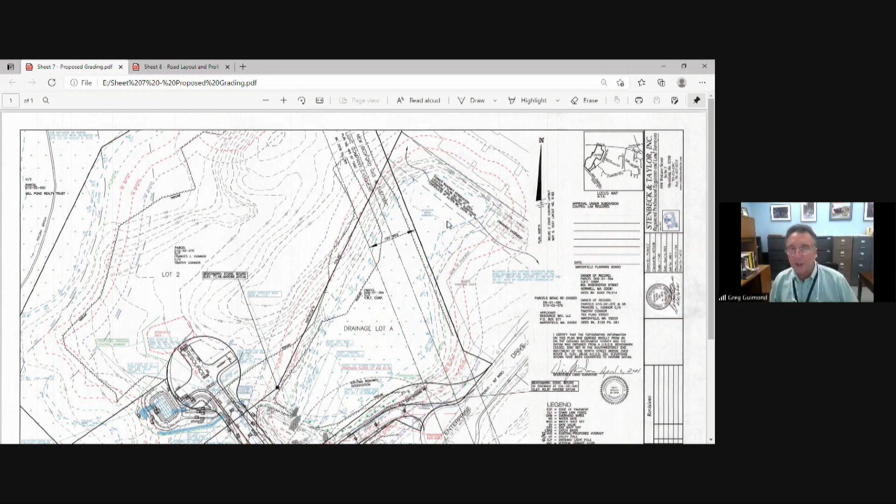Peg, can you hear us? Peg, can you hear us? I can. Okay, we've just started the Resource Way public hearing on subdivision. Okay, all right, Terry, okay.

So anyway, that roadway reservation would have required filling part of the detention basin and presumably replicating the volume elsewhere on the parcel. That would not be allowed under the current conservation regulations.

In 2016, in conjunction with the sale of the Kerwin Surgical property, or the purchase of the additional property, Associated Engineers had shown on paper a relocation of that reservation, kind of looping through a good portion of the basin and extending over to land that was briefly under control of Tim Connor, that had been part of a parcel swap that was then swapped back to VRT.

Likewise, that would have required filling a good portion of the basin in order to construct that roadway.

In 2018, VRT wished to develop the portion of that parcel lying to the southwesternmost area adjacent to the state highway, and put the electronic messaging board in a small building that they could work out of in order to monitor the office park itself if need be. Through ZBA and through conservation, a site plan was permitted to basically undertake that work.

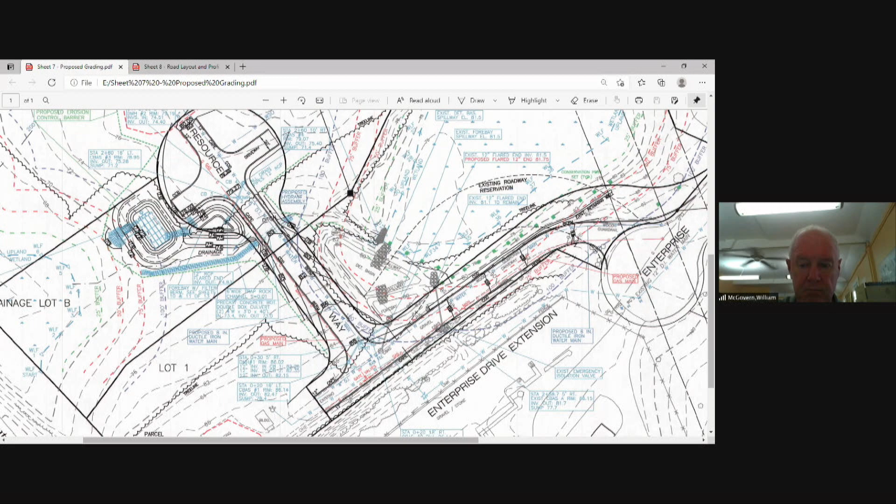This roadway, the Enterprise Drive extension, will access at a 2% grade off of Enterprise Drive from the cul-de-sac. We'll have a leveling area as we come in off of Enterprise Drive, and it will tip down at a 2% grade, translate down to a -4% grade in the middle, and then with a low point where this intersection is going to be, and then transition.

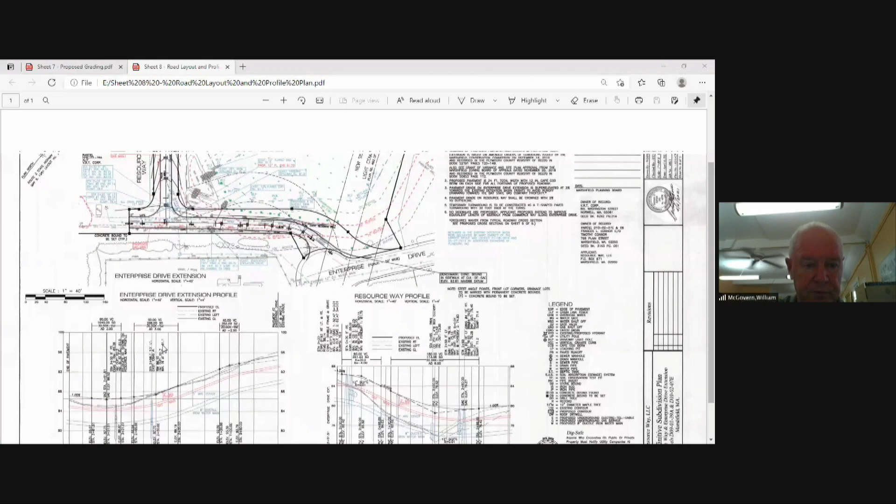And actually, I'm just going to flip, make sure I'm sharing, and then I'm on the profile sheet so that I have this correctly. And we'll transition to...

The remaining roadway going in, Resource Way, will go into the adjacent Connor parcel, coming off at a -1% to a 5% grade in the middle, and then leveling out with our low point being in the area of this T turnaround, leveling to 1%, then to +1%, because overall the site is fairly level. There's not a tremendous amount of grade change in this area.

Most of the existing site, the bottom of the existing detention basin is basically around elevation 70. The surrounding grade, up in the area of the wall and the roadway, is mostly in the range of elevation 72 to roughly 80.

The roadway, as we're proposing it, will have 22 feet of pavement with Cape Cod berm on either side. We're doing this for two reasons, and this is one of our waiver requests, shown both in plan view and in our cross section, which I'll slide over to in a minute. The first reason is to try to keep the amount of disturbed area as small as possible on the site.

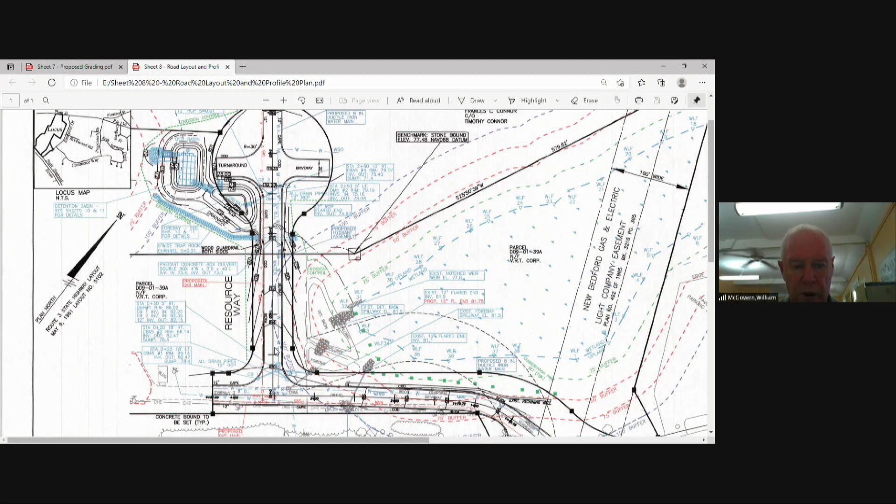Even though the existing detention basin is in fact a drainage basin and has been such, it does have the characteristics of a bordering vegetated wetland. There's wetland vegetation in it, and Conservation Commission has deemed that it is in fact a wetland. In working with them and maintaining the required setback distances, some of which they gave us a variance to, in order to bring this roadway in at a point that would require no disturbance of the basin, we've agreed to try to keep that disturbed area as small as possible.

This proposed roadway is intended to remain private and not be accepted by the town, but will be maintained by the McDougals and by VRT. It's only going to service this one lot or parcel. We'll have a drainage lot on it, solely for drainage purposes, but it will service one lot and is not intended to loop through or connect to any other adjacent parcels.

In keeping a narrower width of roadway, we're disturbing a lot less vegetated and wooded area of the site. Our cross section basically shows it.

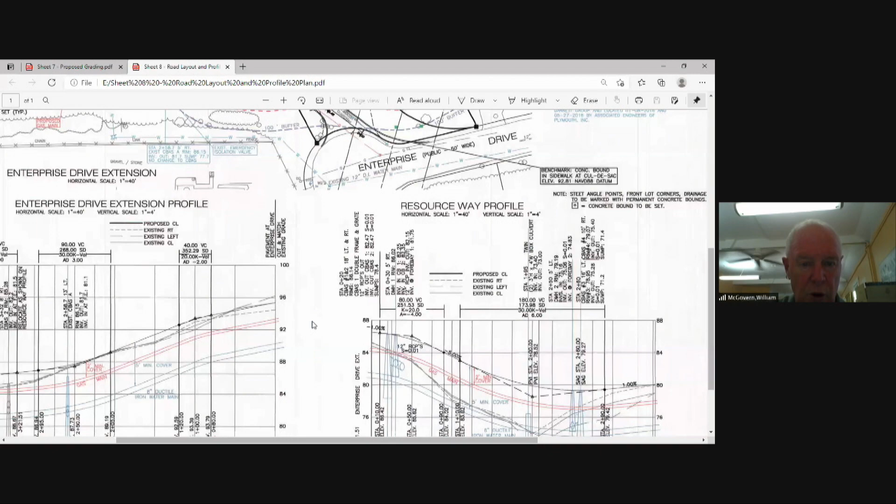What we would then do - I'll have to flip over to one more page to show that - is show a guardrail on either side of the roadway, just in the portion of the area where we're descending at that 5% grade, and we have some 3-to-1 slopes on either side.

And where we have a culvert that we're proposing near the low point, just beyond the property line, in order to culvert and direct any overflow runoff from the drainage basin and continue it downstream in the same location as it is now, we're actually showing a trap rock channel below that.

This has been the source of a little bit of discussion with conservation, because right now the overflow that comes out of there isn't causing a tremendous amount of scour. If you go out there after even a fairly heavy rainfall - I was out there, I want to say it was March, after a really heavy Saturday rain, and I went out the following Monday and took a walk around - basically what you saw was a lot of leaf and pine needle debris pushed around and arcing back and forth, kind of mushed all over the place, following a scattered path through the low area. No real scour, a little bit of sand, a little bit of sediment, but no per se erosion or gullies in that area. That's because there is a little bit of an energy dissipator coming out of that existing spillway.

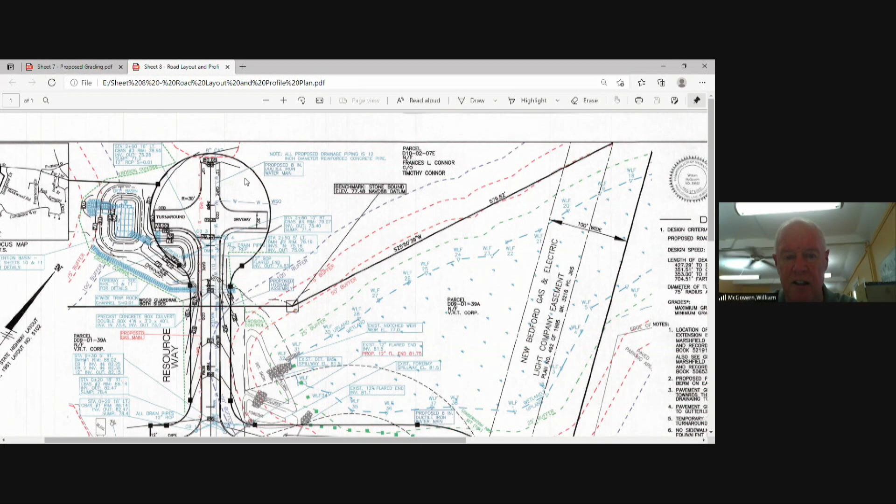Our waivers that we've requested are geometric or construction waivers, and the basis for requesting those waivers is the fact that they're taking place at the beginning of this proposed roadway in an area where we're constrained by that detention basin and by the amount of disturbance that we can create. I do have a couple of comparisons to illustrate, though.

We've asked for waivers regarding width, alignment, and grades of streets. And in my letter, I tried to break it out into a little table, if you will, to make it easier as to what was required and what was proposed. We do meet the right-of-way width.

We do have a 50-foot width, although we're throughout the regular portion of the right-of-way. We're showing as we connect from a property line perspective, as we connect to Enterprise Drive, we're obviously not touching the gas company property line, and we're making kind of a sweep in that area, so that will be an irregular shape.

But again, that's the kind of geometry that the site dictates to us, and we bring it in so that it meets an angle at the property line corner, so that we can bring that roadway in at a shallower angle.

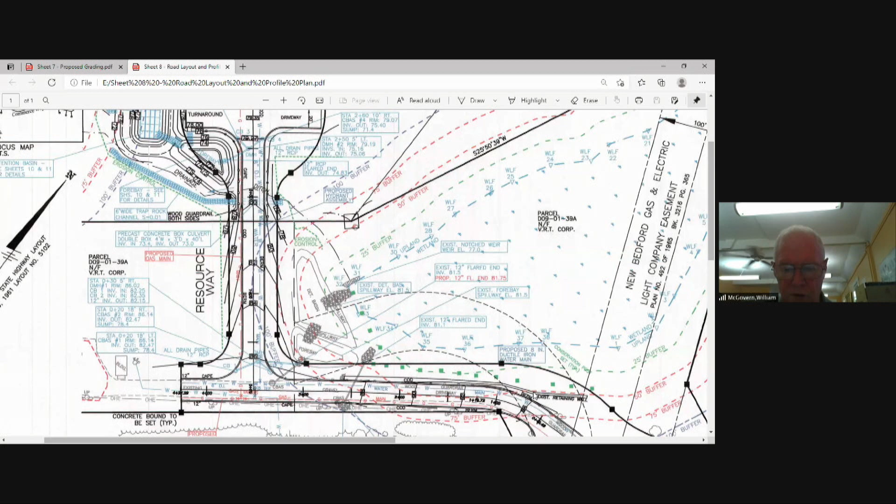On a 40 scale, it doesn't show up nearly as well, but what it'll do is it'll serve to push the tangent section over a little bit. And with that, what I looked at doing was potentially just flattening this section just a tiny bit so that you do come in at a little bit shallower approach in here, which will take a little bit of the onus off of that as well by pushing that pinch point out just a little bit.

But nonetheless, it would be a waiver because we'd be coming off of Enterprise and having less than 100-foot tangent section between the two. We could also put a speed limit sign up on it as well. But yeah, road narrows is absolutely appropriate.

The other, and obviously with that, with the geometric construction waivers, we'd be asking along with that the waiver for way lines being parallel and concentric, again, because we're coming off the existing cul-de-sac. Once you reach the point where that line can sync up with the gas company property line, then your cross section, or at least your roadway lines, are parallel and concentric.

And the new portion, it would push over into Resource Way, is a concentric layout. Everything is right down the middle there. Our center line runs the same.

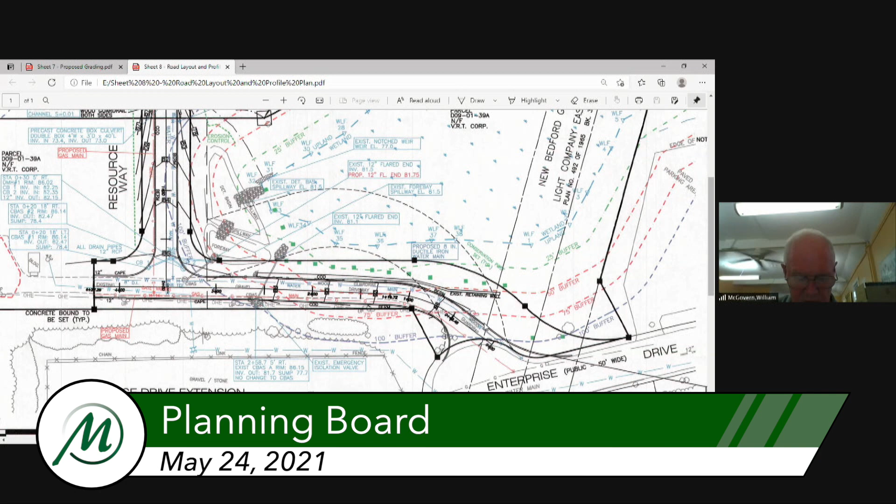The other two waivers that would be considered discussion worthy would be, obviously, length of dead end street. We're requesting a length of dead end street of just a little bit over 704 feet, where 600 is the maximum. That's through the back end of the cul-de-sac, and it's so that we can place this T turnaround in the location that it's shown.

Rather than try to pull this back and place a cul-de-sac overlapping both properties, and also place the cul-de-sac at a location where it would fall over the existing drainage channel that's been in place since the 1980s. To make it work physically, to maintain the existing drainage characteristics of the site, and to allow that overflow to continue in the same location it's always been, and not try to create more disturbance by having to move it. We're requesting that 100-foot, slightly over 100-foot waiver to leave that in its existing location. That physically makes the most sense, and it makes the most sense for the remainder of Enterprise Drive going back upstream.

The other waiver that we've requested is sidewalks. However, what the McDougals are proposing is to go back up, because this will be accessing their contractor yard. They obviously are not going to be doing a lot of walking up and down in that area. However, what they have offered is to go up and reconstruct a good portion of the existing sidewalk along Enterprise Drive, going up from Commerce Way up towards Plain Street, in an area where people from Modera are utilizing that in order to get out to 139, whether they go across to the Ming, or they just take and walk that area and circle around through that area.

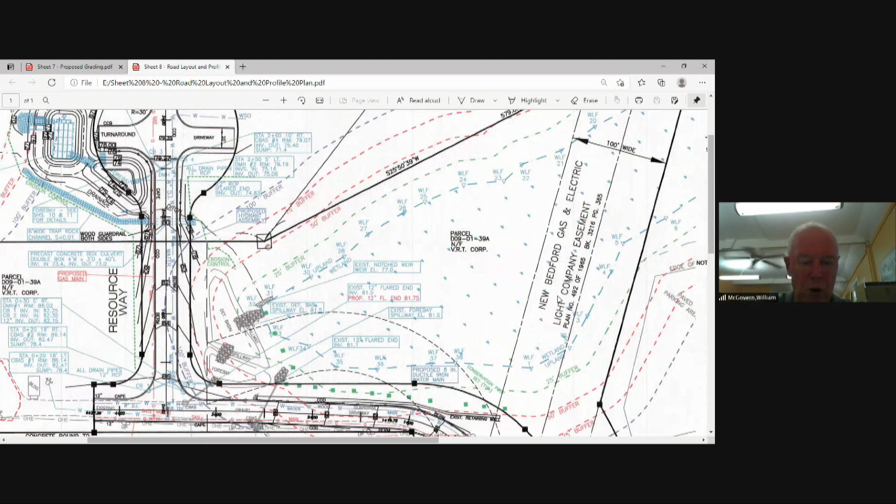Okay. And Mike, also the DPW is okay with the hammerhead versus the cul-de-sac. They're okay with the 12-inch Cape Cod berm. Terry, the one thing that they were looking for is the design information or as-built plans for the existing retaining wall on that opening, that beginning section. Yeah, and Mike McDougall will furnish those. Okay, I'm all set, Mike.

Pat is here, I believe. Okay, Pat, do you have any other comments to add or concerns? Not really. I submitted a letter to the board on May 6th with a number of comments. Most of them are editorial in nature.

The only two things I would bring up would be the width of the Cape Cod berm. They were showing 12 inches and 18 inches in another location. Your rules and regs call for 18-inch, but it's been my experience that only one paving company actually has the equipment for an 18-inch Cape Cod berm. So we've been going with 12-inch and typically making the road another 6 inches wider in those situations where it calls for an 18-inch.

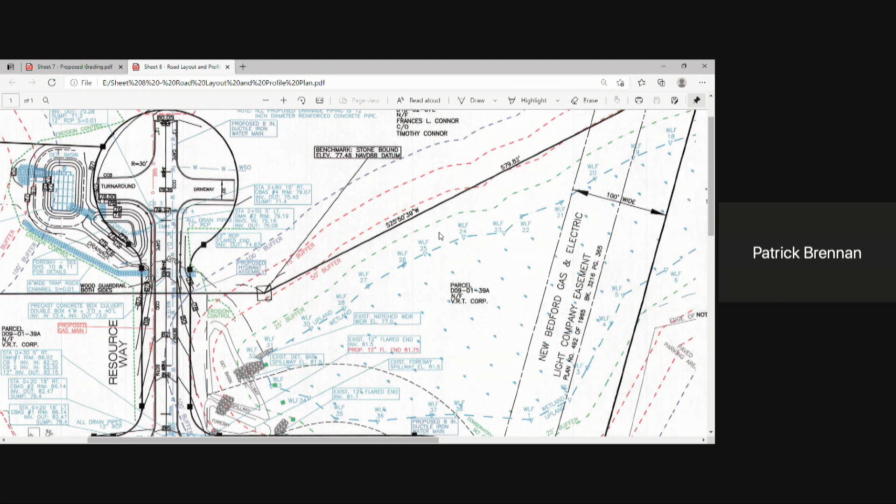My other comment, and I believe Terry just mentioned that they did the additional soil testing a couple of weeks ago, so that was the only other comment. The other comments in my letter I've discussed with Terry, so I know he's working on addressing them, and I think they're fairly easy for him to address.

Okay, thank you, Pat. Any questions or comments from anyone on the board right now?

I would just reiterate, I know that in past subdivisions I've felt differently, but I think this looks pretty good. The extended roadway, where it's only accessing one lot, and it's been very explicit that it will only be for this one lot, that doesn't bother me. Also the reduced width of the roadway, but because they have the full right of way and could technically do that, in order to reduce disruption to the site I like the sound of that too, but I just thought I'd clarify since I've felt differently in other subdivisions.

Okay, thank you. I agree with you on those, those are good points. Anyone else from the board before I go to the public?

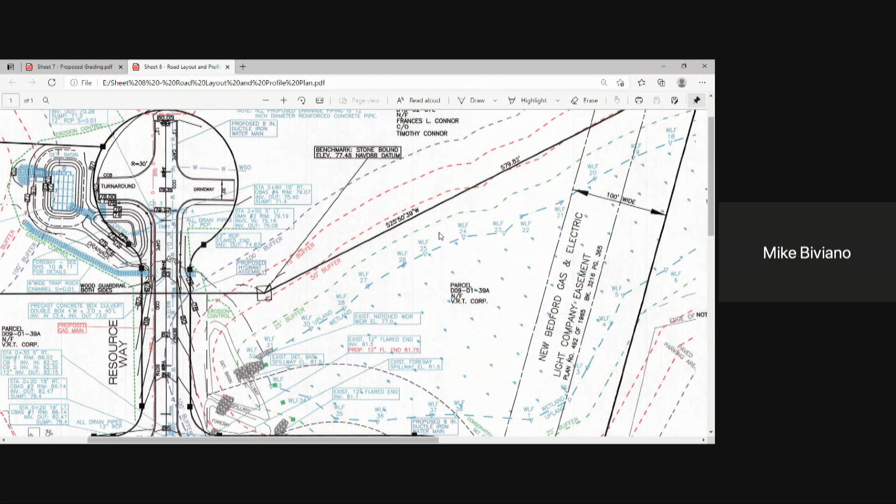Seeing none, is there anyone from the public that'd like to make a comment or ask a question? Okay, I don't see anyone from the public.

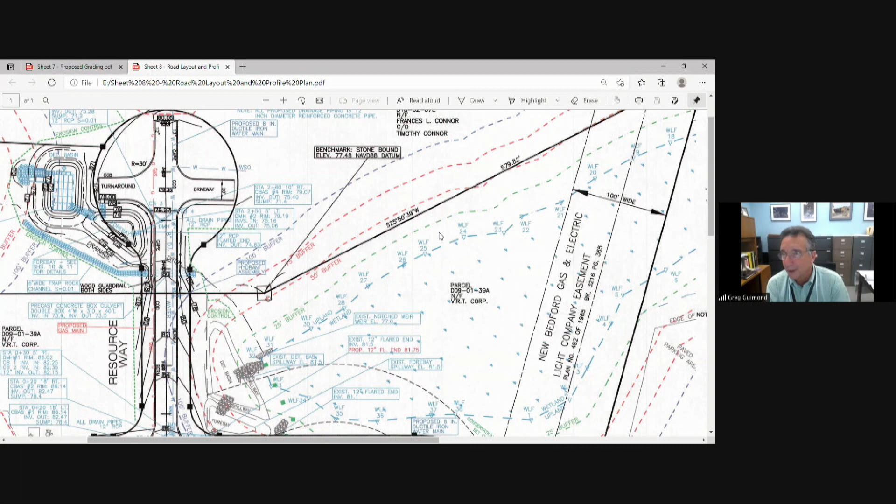So we have a couple of issues still to change in the plan through Pat's comments. Greg and Terry, that's where we're at right now? Yes. So I have a question for Terry. You've got maybe 4 or 5 small things DPW was looking for, and a few things from Pat to correct the plans. Is this something you feel you can get done fairly quickly, or would you be able to get to me, Pat and Rod, so we could write a decision without having to do this and do this?

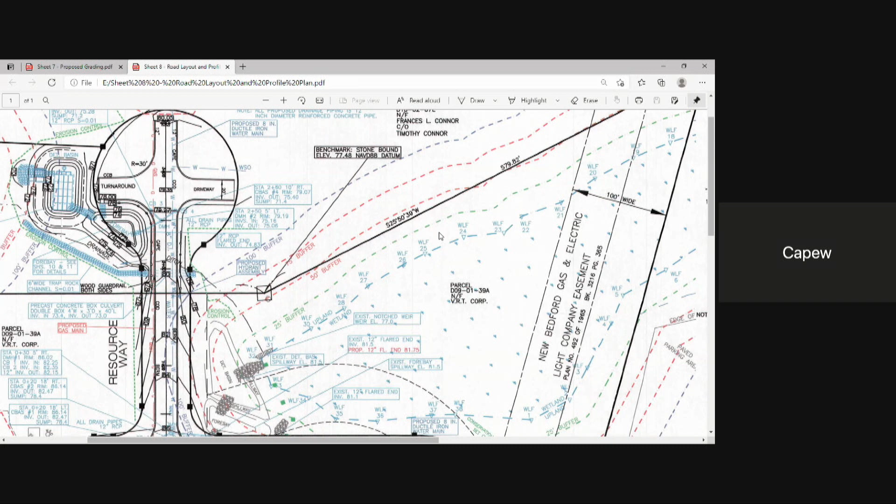Yeah. The honest answer is most of the requested changes have been made. We're actually back in front of Conservation next Tuesday, I believe. So what I'm hoping to do, I obviously won't get plan changes in to meet their deadline, and I don't like to ping pong back and forth. So what I'd like is in my next go round with Conservation.

When are you guys back on? In 2 weeks or 4? So we're in 3 weeks, on the 14th of June, which is becoming very full. Okay, that's okay. What's your next scheduled hearing after that? The 28th of June is the next one after that. All right, so that's just about 4 weeks out.

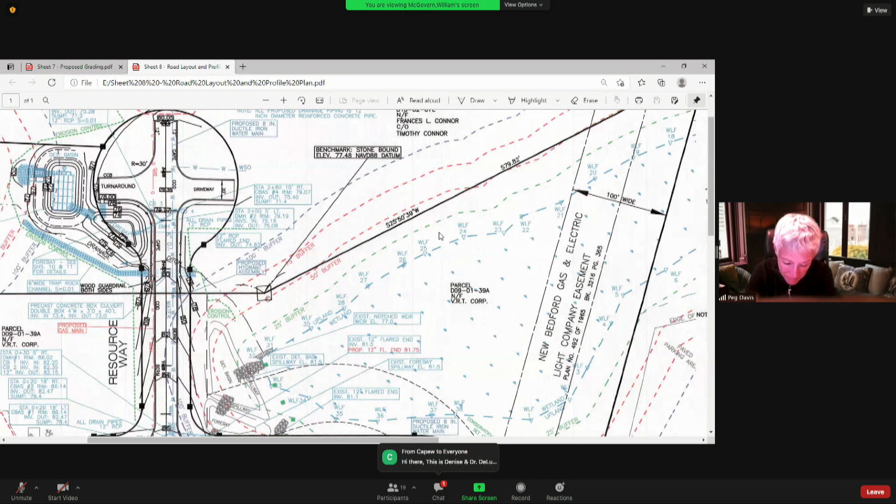I think given the questions that Conservation has posed, they've kind of left them open-ended, and I want to circle through them. From my perspective, everything I need to do to clean up the technical details could be done for your next hearing, but I want to get on a more solid footing with Conservation, so that everybody's lined up on the same page. That makes sense. And Terry, I agree, instead of coming back around and having to make changes, let's hold off.

We have a question, Mike. It's from Capeway Eye Care, 709 Plain Street. Where is our building in relation to this? This is at the very end of Enterprise Drive, to the southwest of the gas company facility.

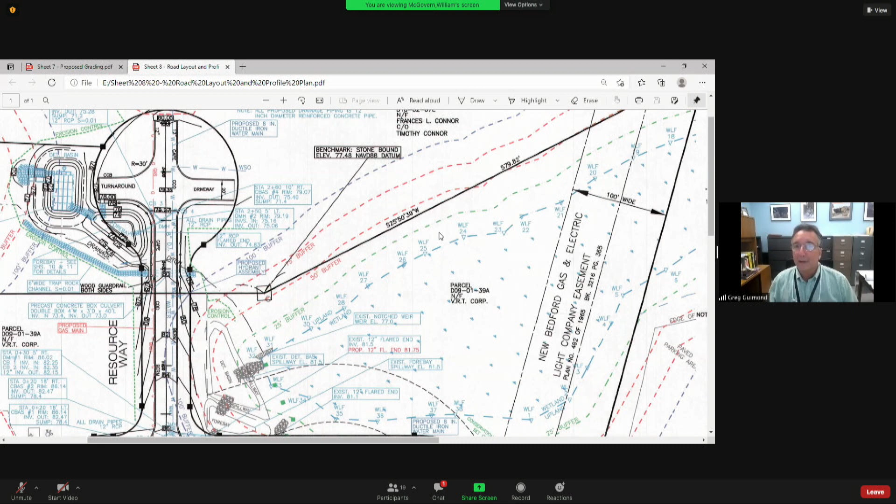Terry, is there anything else you want to add to that answer? Nothing other than there's no access planned off of Plain Street, and no access through Plain Street, other than Enterprise Drive. There's no new access. I believe Capeway's in the beginning, right, and then you're on at the end.

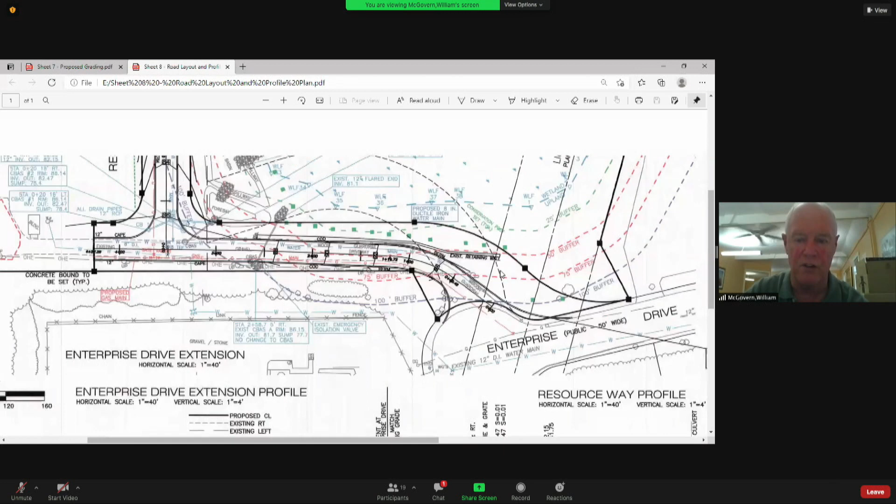Yeah, our property line that will be created out of this subdivision will actually run parallel to the edge of the electric power line easement. So the remaining land from there, or about from WATD all the way back up to Plain Street, is going to remain Tim Connor's land.

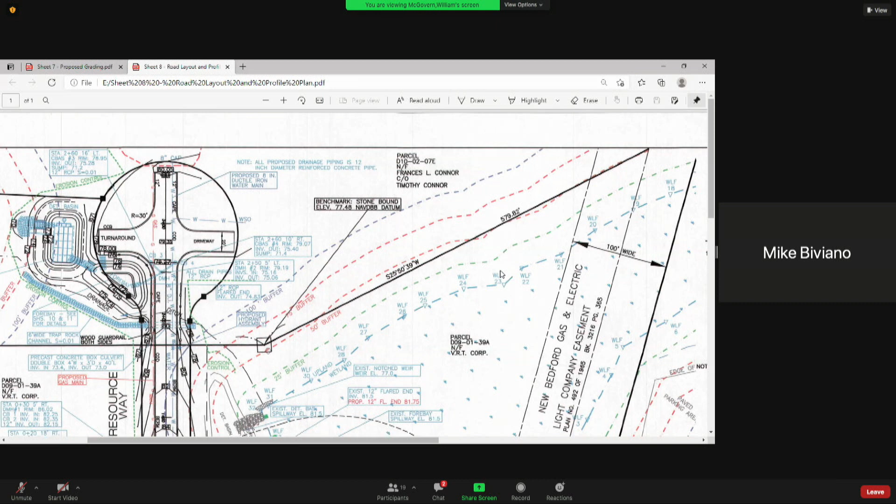I think they may be more interested in the next public hearing, which is the Ace Hardware VRT proposal up Plain Street. Okay, any other questions from the public at all? Seeing none. Greg, we're looking to extend this to the 28th.

We'll continue the public hearing to the 28th. I'm going to try to get a draft decision so you have something to work off that night. If things get tied up with Concom, we can hold off on the draft decision, but if things go smoothly, hopefully with Conservation Commission, we could wrap it up. That will give me the 1st and the 15th to settle things out with Conservation. I want everything to line up on the same page.

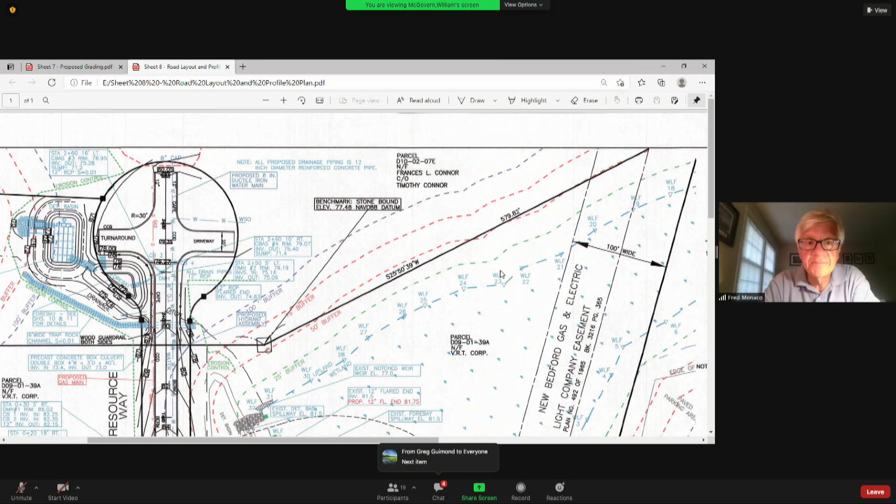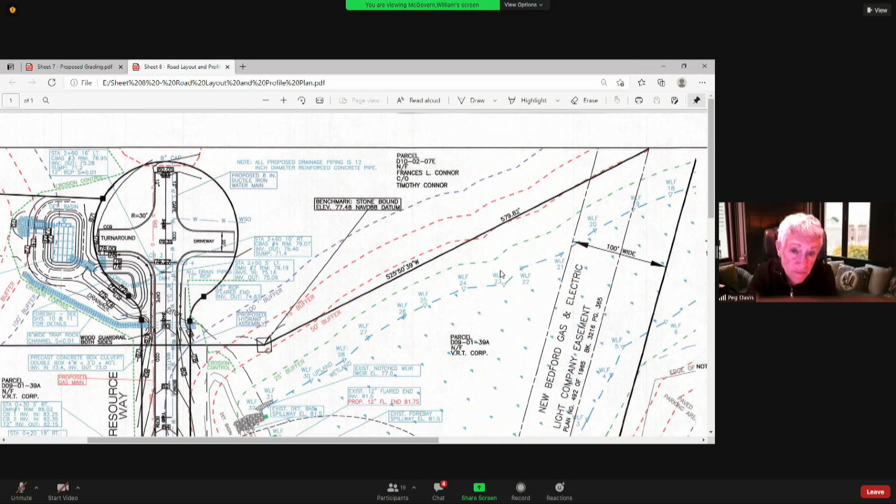Okay, that's fine. I'm going to make a motion that we continue this public hearing until June 28th at 7:05. Is there a second? Second, Katie O'Donnell, aye. Nick Papastratus, aye. Fred Monaco, aye. Kevin Cantwell, aye. Mike Biviano, aye. Peg Davis, aye. Okay, thank you, that's continued to the 28th.

Thank you, everybody. Okay, thanks Terry, very much. Good presentation, Terry. Thank you. Gotta remember to stop share and give Greg the screen back. I went away one time and left my screen up and conservation was not happy with me.

Good night, everybody. Good night. Thanks.

All right, so at this time I'm going to make a motion that we open up the special permit public hearing for Ace Hardware and the PMUD WRPD. Is there a second? Second, Katie O'Donnell, aye. Nick Papastratus, aye. Fred Monaco, aye. Kevin Cantwell, aye. Peg Davis, aye. Mike Biviano, aye. So that hearing is currently open.

Is there someone here to present it? Yes, my name is Gabriel Padilla. I am with Grady Consulting, representing Ace Hardware. We did receive the review by Mr. Brennan, and we also received the WRPD notes. We got those last week, so we still have some open-ended things, but I would like to have an opportunity to present the project, and if anyone has any questions or comments, we can address everything at once.

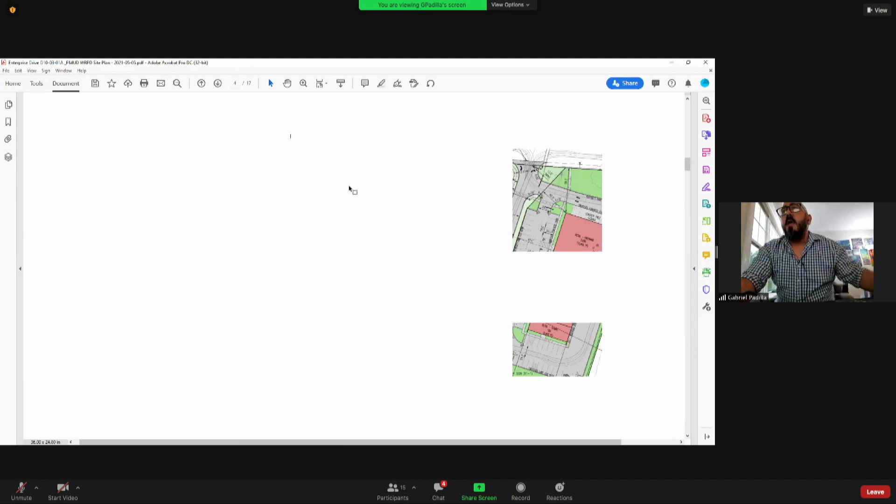So the focus that we're going to have right now is pretty much on Ace Hardware, which would be on this side of the screen, the right side. However, this is part of the larger development where we have office buildings, daycare, retail, and then Ace Hardware here to the right.

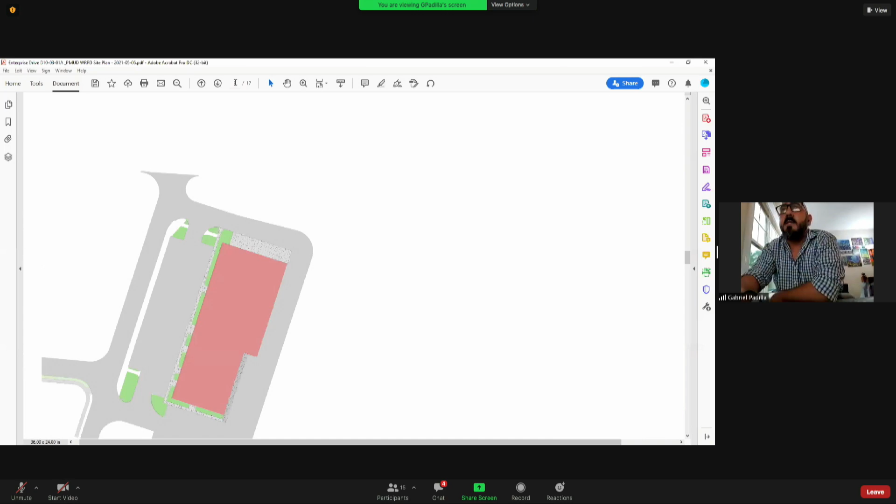I'll go now to page 9. Let's see, so here I have a plan blow up of Ace Hardware. We are proposing to have a right in, right out entrance. I got an email today saying that Mass DOT did review it and they are fine with having a right in, right out at that location going out on Plain Street.

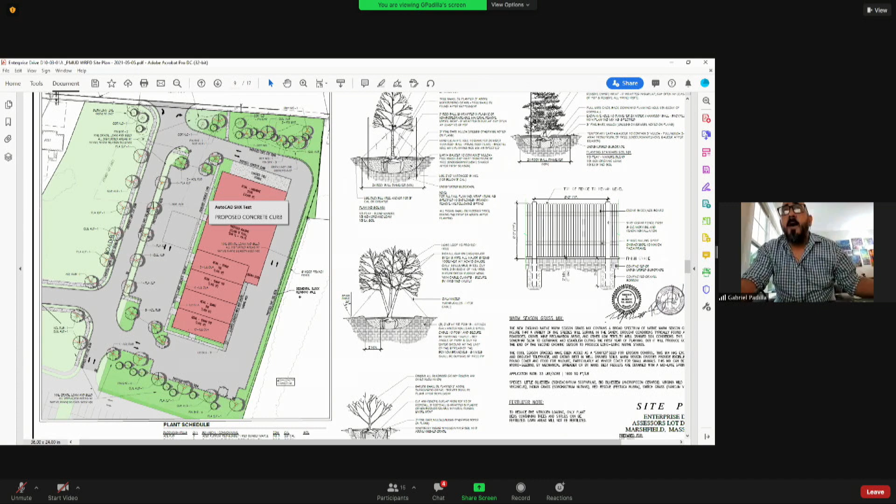There were some comments regarding the entrance distance from the edge of pavement over to the entrance of the lot. Those are one of the things we are addressing. Apart from the other comments that we have, Ace Hardware would occupy approximately 12,500 square feet of the whole building. We are also proposing 4 more retail spaces. The tenant is still to be decided.

We are also proposing, for a septic system, a denitrification system, being in WRPD, we need to comply with those regulations. Somehow I didn't make this plan, but it will be in the corrected version. We are also proposing to straight infiltrate the roof water, in terms of water quality volume control. You could see the outline of what would be that underground Cultec system, it's a galleys. We would just infiltrate everything in there.

We have parking spaces, we have the dumpster. The dumpster was moved, it was originally placed here, but now it has been moved in the next revision. Along this edge, we have a swale coming down and a segmental block retaining wall alongside here. That wall is not going to be over 4 feet at its maximum. That's going to swale down to this area down here where it will just go to a catch basin down in the lot.

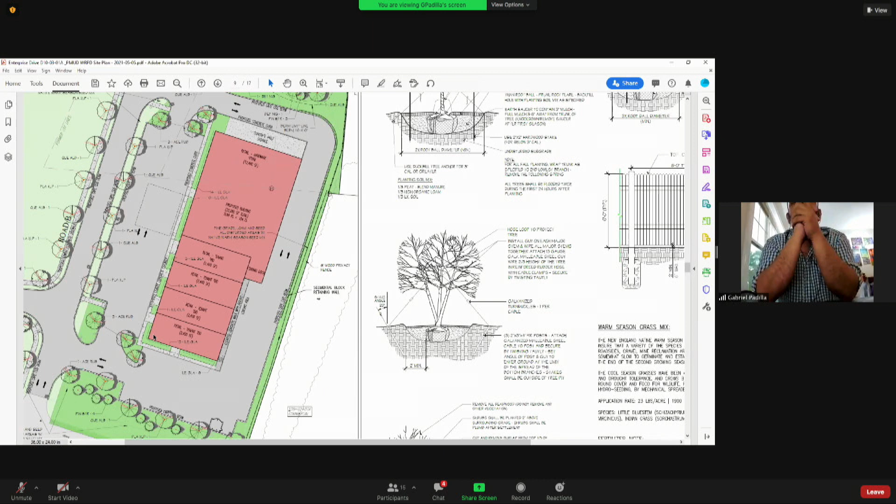And that's pretty much this part of the project. And if you have any questions you would like answered, I would gladly answer them.

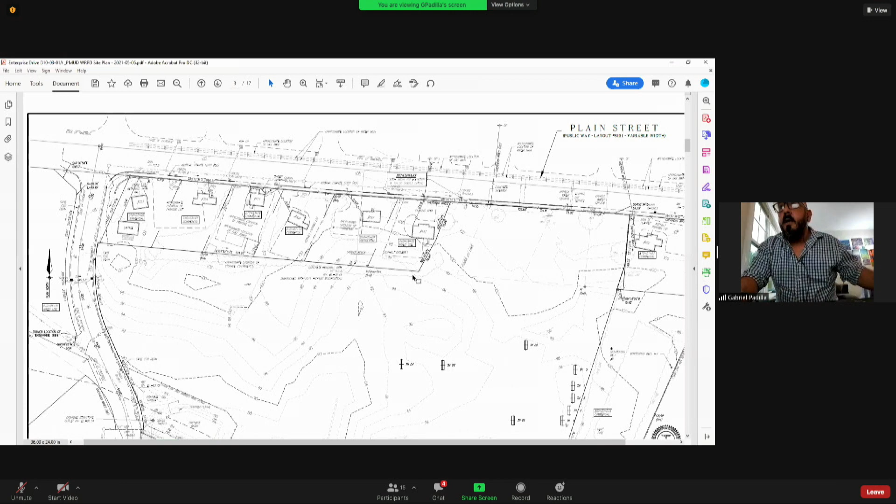Is this an existing site at all? Is there anything on this one? No, actually, the existing conditions, I'll pull them right up. It's an empty lot. It has been cleared. There were some houses here. They were already removed, so this is an open area. It's an open field pretty much.

So it's that open field right up by the main road. This area, yes, as of right now, this area is cleared. And this area is pretty much cleared, but it's not very well graded for access. The access would be around this area, right next to the existing pond.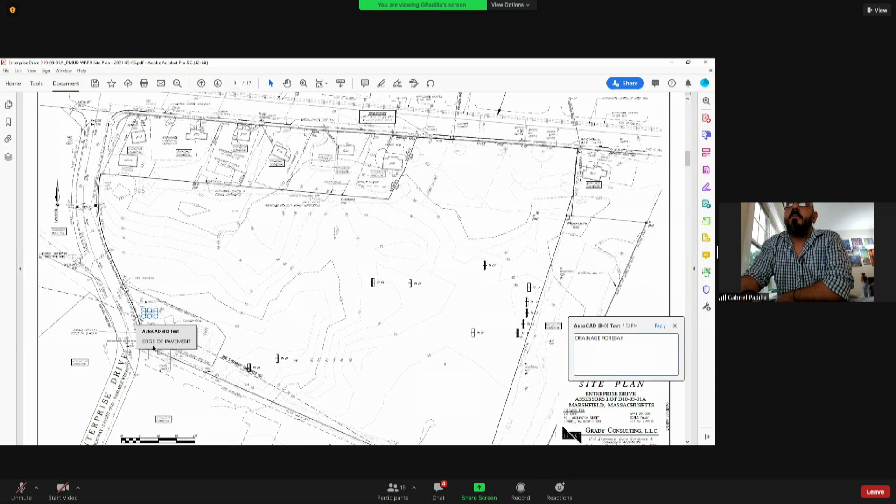Okay, Greg, any comments to mention at this time? A couple of things. Pat is here, so he has a number of comments. But I would just start off with the curb cut is the planning board's jurisdiction under the special permit. The zoning specifically says it needs to come in and out of signalized intersections, not directly onto 139. The distance between 139 and that northern driveway, the 90-degree angle for roadway B onto Route 139.

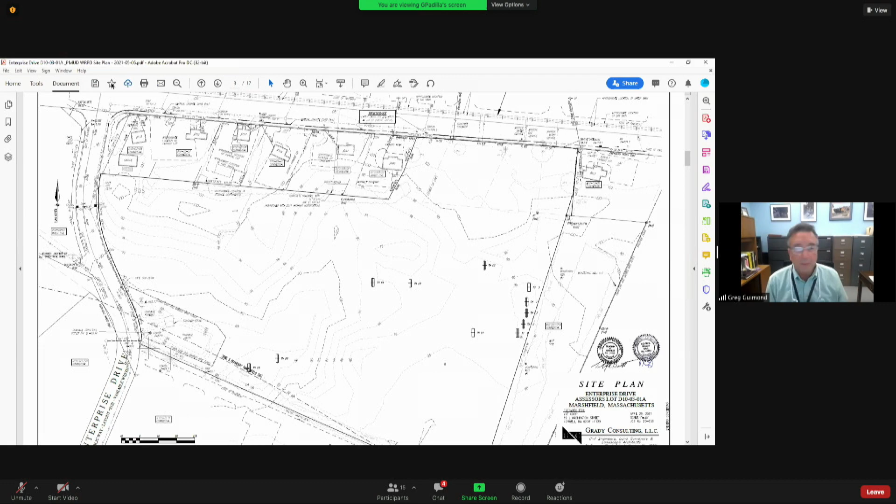And the roadway itself, if you could open up sheet 2 for a minute, go to sheet 2 for a moment. So they're showing an ANR plan, which we will have after this public hearing is over. There is a road network that cuts across lots 3 and 4 and 2 and into 1. Well, actually, it doesn't really touch 1. It's on 2. Is this a roadway or is this a driveway?

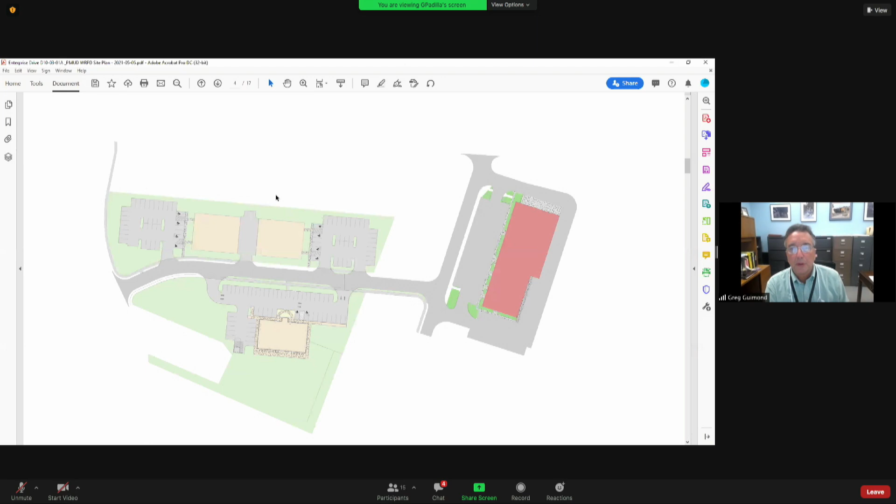The problem is you got, especially on lot 3, you see that 150-foot radius, that circle that has to come in and out. 22 feet of lot 3 on the south side is used up. If you go to sheet 4 right now, so you can see that road network and you can see the property line is in red. Most of that road A is on that parcel, and we got to figure out how we're going to deal with this.

We have allowed driveways in the past. In this particular case, because you have 2 office buildings, a daycare center, and a lot of retail going in on a site that was originally programmed as a research and development site, our traffic numbers are going to be higher. I do need a little more time on that traffic because I have to finish going through the current traffic report, pull out all the previous traffic reports, and find the state review numbers as well as the assigned traffic mitigation numbers.

And that kind of goes towards that 100,000 square feet of research and development that was supposed to pay $83,082 towards traffic improvements. This number, even though the square footage is lower, a little lower, the trip generation number is going to be a little higher, which we're going to have pressure on the lights at 139 and Enterprise. That curb cut is something that could relieve some of that pressure, but it could also cause left-hand conflicts. People, because it's just striping, we're going to have people trying to take left-hand turns in and left-hand turns out. So again, on the traffic side, I would like a little more time to finish that review.

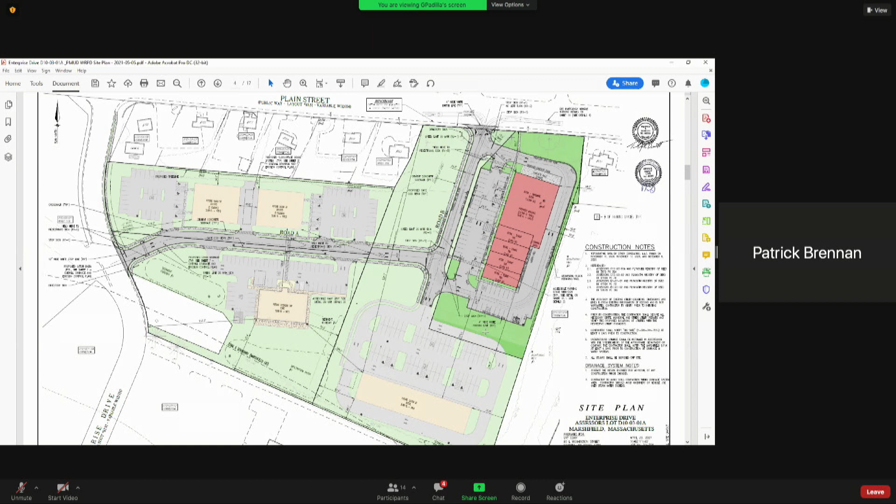Okay, that's a good idea. One other question on that drainage lot that shows on the current sheet that you're showing us to the left over by Enterprise Drive, that's shown in white. Is that an easement to the state or to the town? That's for 139, right?

Yes, that was part of 139 of the project on 139. Yes, okay.

Is that part of the 11 or whatever acres, or is that, because it's not shown in green? That's why I was asking. I don't think it's in there, I will have to check up on that. Yeah, I'll check up on that.

The only other thing I could think of towards that discrepancy is the bank, which was proposed over where the north arrow is, originally was part of this bigger parcel. I know that got separated off when the road came in, but at one point Billy Last Jr. had mentioned he was still considering part of this bigger parcel. You guys then bought the 3 smaller lots in the front and stuff, so some things have changed, and that's why it's a little confusing on what the total acreage is. I'll make sure to clear it up.

Okay, Greg, may I? Yep. So the original lot was 11.1 or 2 acres, and then the new Enterprise Drive entrance came, which cut off about an acre. And then we bought the 3 houses, which was about an acre. So the current configuration is approximately 11 acres.

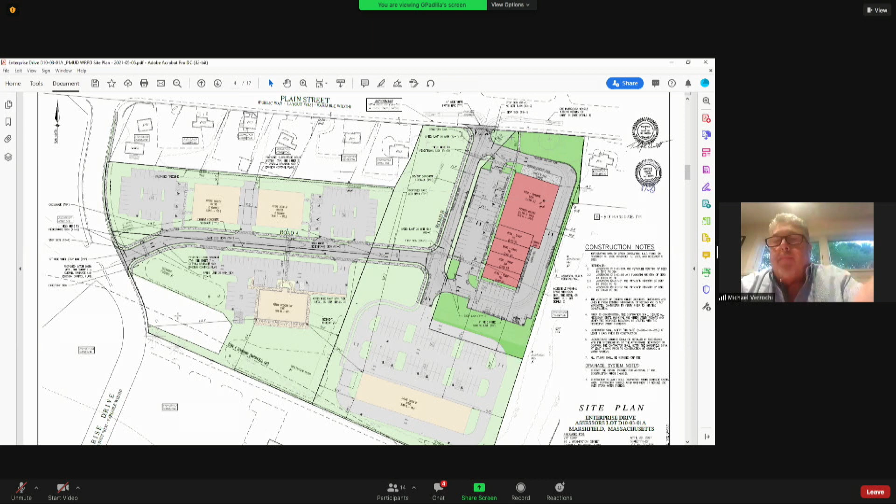Okay, and that includes that drainage thing to the state? That includes the drainage from 139, that basin down the lower left. Okay, thank you.

Okay, any comments from the board at all at this time? Okay, any comments from the public at all?

Greg, are we trying to get this on the 28th as well, or what are we looking at for a continuance? Mike had asked about the 14th. So it's either the 14th or the 28th. We do have a couple other items on the 14th already that are large, Michael, so if we do put it on the 14th, it would be later in the evening. That's fine, we'd rather be on the 14th, if that's possible. Thank you, we'll put it on for them.

Seeing no questions from the public, none from the board at this time. Thank you, Gabriel, for the presentation.

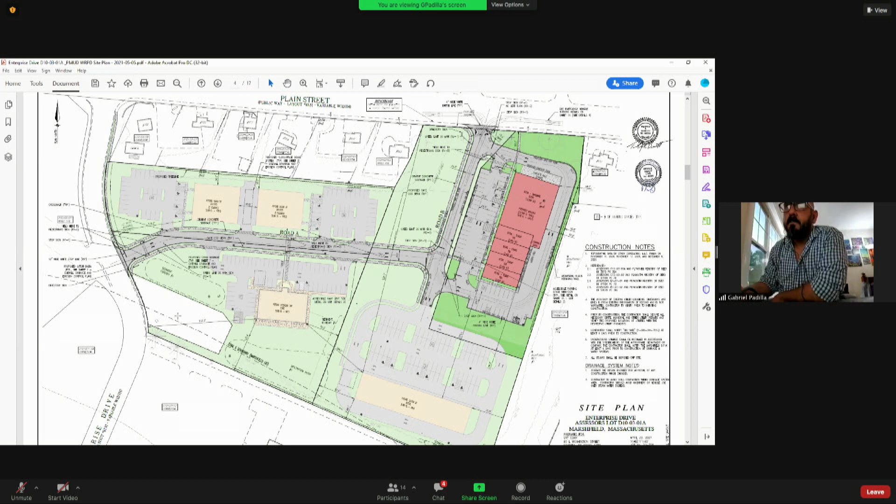Thank you very much. I'm going to make a motion that we continue the public hearing to June 14th at 7:05, but you're number 3 on that list, so it'll be a little bit later.

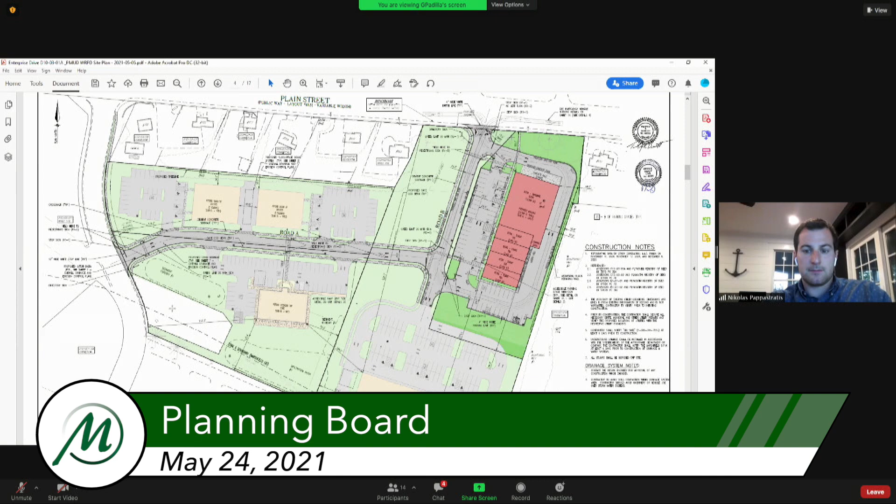Is there a second? Second, Katie O'Donnell. Aye, Katie O'Donnell. Nick Pappastratis, aye. Fred Monaco, aye. Kevin Cantwell, aye. Peg Davis, aye. And Mike Viviano, aye. That's continued to the 14th.

All right, at this time I'm going to open up the A&R plan for Ace Hardware. Is there a second? Second, Katie O'Donnell. Aye, Katie O'Donnell. Nick Pappastratis, aye. Fred Monaco, aye. Kevin Cantwell, aye. Peg Davis, aye. And Mike Viviano, aye.

Gabriel, do you want to pull up sheet 2? I believe that's the A&R plan. Oh, he muted himself.

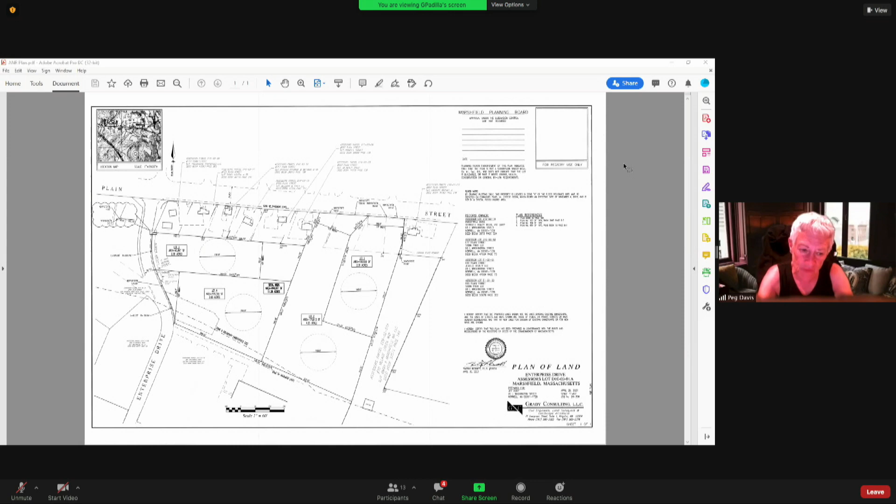Right here. Are we looking to vote in the ANR before everything else gets worked out? I did have a concern about that, but I think that needs to be discussed first. Gabriel, what are your thoughts on that? Are we going to go through all this ANR without having the other part of it taken care of? I mean, wouldn't the ANR be kind of independent? This sounds absolutely independent, yeah, but it's a lot easier, I believe, than the whole other project together.

Right, so the concern is the PMUD needs 7 acres minimum. I know the desire on the ANR was to get lot 1 separated for the hardware store, but in doing that, you're potentially not in compliance with the special permit anymore if lot 1 is to be sold off immediately.

So we would have to go try to get a vote now, if we could. Did you say try to vote on it now? I mean, is that the suggestion? I wasn't clear on that. I'm just wondering if the project changes and we vote this ANR in now, maybe it doesn't work that way. And if the other project does get approved, you come back in for the ANR and it'd be a little bit cleaner, I think. Am I right, Greg, on that?

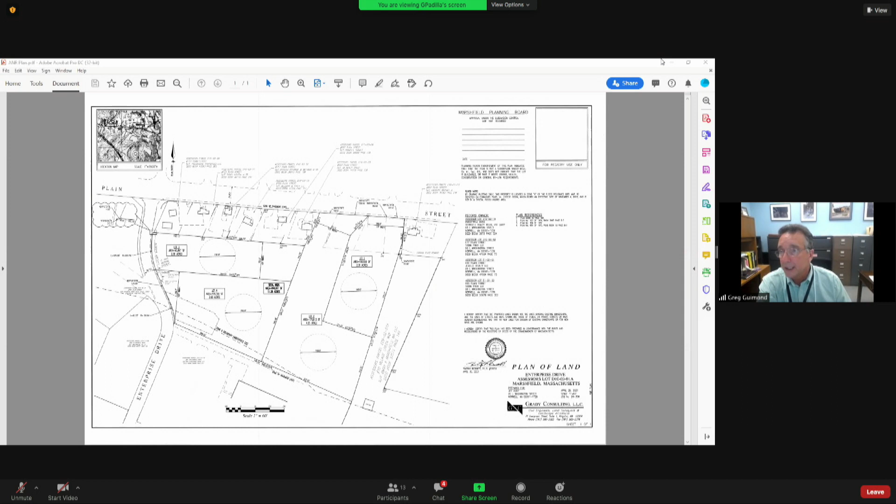It would be cleaner. If you were to force the vote and the board voted against it tonight, you have a time frame under the state that, or if the board took no action, you could then go to the town clerk and ask it to be signed. I was not particularly going to ask the planning board not to vote or vote against it. I just wanted to put it out there as far as the property owner and the proponents, that a sale of the property immediately may hurt you in the future if something goes wrong with the PMUD.

Could I refer the question to the client, Mr. Verocchi? Sure, I think it makes sense to postpone it. Respectfully ask it could be postponed to the 14th. Yeah, I think that's a good idea.

I agree. So Mike, I'll need an email saying that it's okay to put this on to the 14th of June so I can give it to the town clerk, because we have that 21-day clock. I'll send you an email tomorrow, is that okay? That's fine, thank you. Great.

Okay, so with that being said, I'm going to make a motion that we continue this hearing until 6/14/21. And this is for the ANR for Ace Hardware.

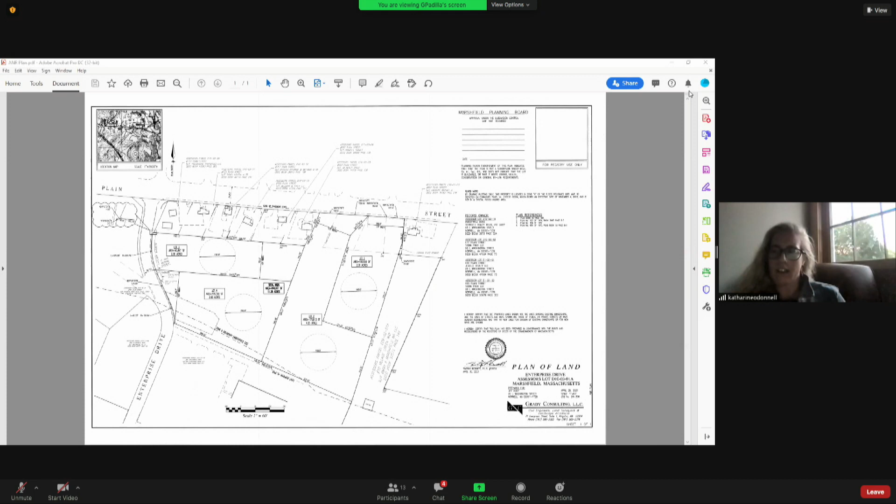Is there a second? Second, Katie O'Donnell. Aye, Katie O'Donnell. Nick Pappastratis, aye. Fred Monaco, aye. Kevin Cantwell, aye. Peg Davis, aye. And Mike Viviano, aye.

So we're going to continue that one as well. Thank you very much. Thank you very much, everyone.

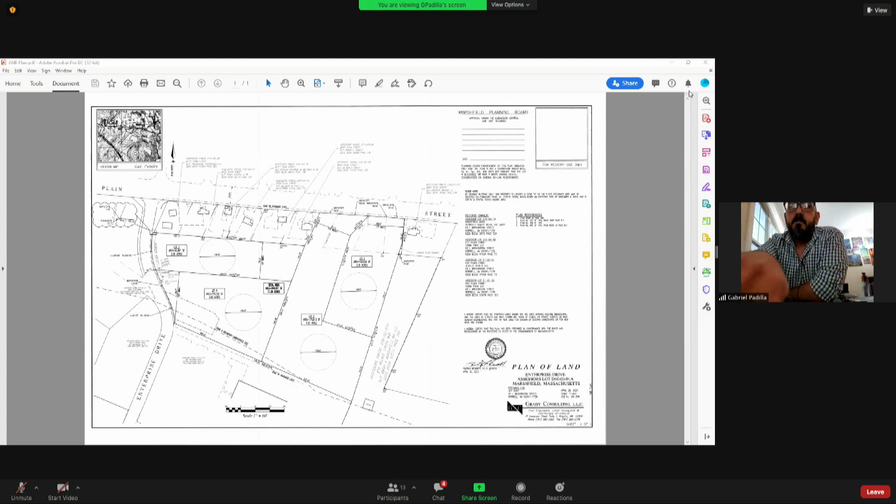Greg, I guess I open this one up to you for the discussion of the draft revisions. Actually, I get to hand this one off to Karen. Oh, okay, Karen.

When the zoning was changed a couple of years ago, the regulations were a little lagging behind. So the parcel size was still the larger size, so we've changed it down to a 7-acre parcel size and combined. Before there were 2 phases of the PMUD, and so we've consolidated those and taken out the redundancy. We've also changed the numbering, because if you remember last time when we discussed potential zoning changes for the fall, we were going to move the PMUD section within the regs. So any comments or thoughts when you read through them would be most helpful.

I don't know, Greg, was there other part to add? No, but we would require a public hearing in order to change our rules and regs. After the public hearing, the board gets to vote, and then we file it with the town clerk, who then files it with the E-code people.

My thought was we could either do this first or hold off, and when we do our zoning change for the fall town meeting, which is going to be probably around the August timeframe, we put it into that public hearing to save money on the public hearing costs. But the first question was, are you guys okay with the changes that Karen has come up with to basically correct or make the rules and regs match our current zoning?